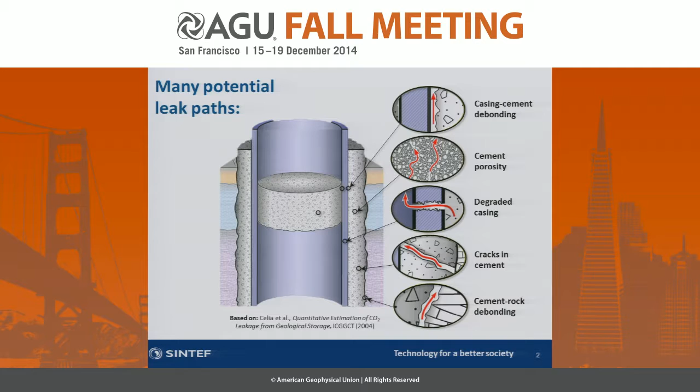And then after cementing, you can, of course, have a variety of flow paths. You can have leakage between the casing and the cement, between the cement and the rock, or through the cement, either through the porosity of the cement, or through cracks in cement, or through degraded casing. And this is, of course, the same when you plug the well. You will again be struggling with leakage paths at the edge of the plug or through the plugging material.

So what we did in the BIGCCS project was that we wanted to try to find out what the size of the apertures of these leakages are. So how large are these microannuli that people are talking about, and why and where do they most likely occur in a well? So what we did was to first make some small samples, as you see here, with a hollow rock cylinder with cement inside.

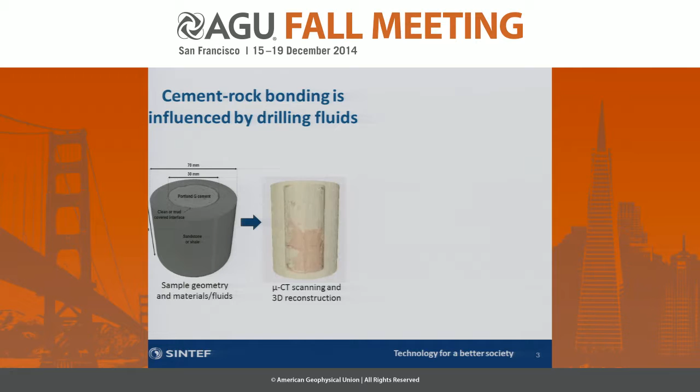And then we varied the surface properties of the rock, so they were either mud-covered or clean. And we used two muds that are very typically employed, so oil-based mud or water-based mud, both commercial muds that are used by industry. And then we scanned these samples using microcomputed tomography, and then reconstructed them in 3D.

And we identified the porosity at the interface between cement and rock. That's the pinkish stuff that you see in the volumes here. And we did that for a lot of samples. I'll show you 6 of them here. So we also had filter cake at the edge of the sandstone and the cement. In this case, you see the no mud, the water-based mud, and the oil-based mud cases.

And this is relatively interesting because in Norway, the use of the oil-based mud is restricted because they're afraid of leakage of the hydraulics when you're drilling the well. But what you see here is that the oil-based mud is actually giving the best bonding compared to the water-based mud, both for a sandstone and a shale sample.

And the V here is the volume of the flow paths, while the B is the bonding percentage. So it's the percentage of the cement surface that is in direct contact with rock. So if it's 100%, then you have perfect bonding. And then the more interface pores you have, the lower the bonding percentage.

And then this no mud situation, where you don't have anything at the interface, that's of course a simplification that you cannot achieve in a well. Usually if you use spacers, etc., then you will still have some mud at the interface when you do your cementing.

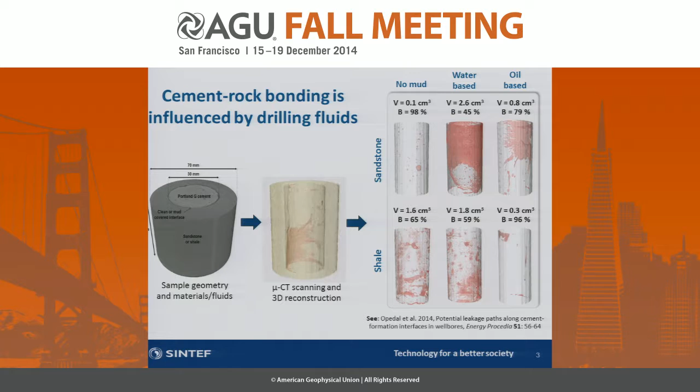So then we did a lot of mapping of this for the rock cement surface. And we did the same also for casing cement. So then we made a variety of samples, again mapping the interface pores using micro-CT. And in the case of casing, we saw very few pores at the interface.

So the casing is gray here, and when it looks bluish, it's because it's surrounded by a layer of mud-affected cement. But the porosity in this case was not at the interface. So of course, to be able to determine any type of leakage from these samples, you would have to check the properties of this mud-affected cement in each case, because there was very little porosity that could be seen by CT.

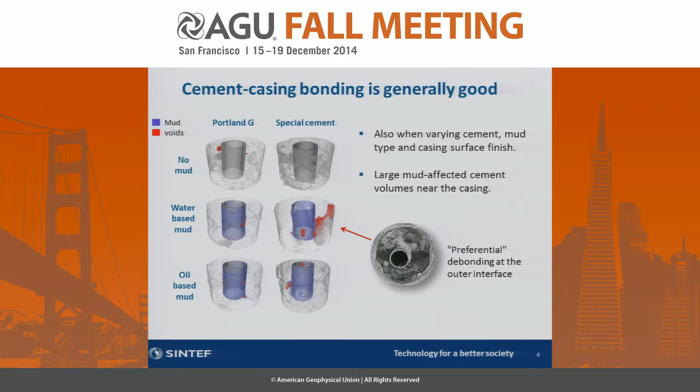And what was interesting is that this very good bonding that we saw in this case seemed to be a geometry effect, because we were making these samples in autoclaves, and at the outer surface of the autoclave, you saw more debonding. So this is exactly the geometry that was used when we looked at the cement rock bond. Then you had a rock surrounding a cement. So that might be something related to geometry there, and that's something we're looking into right now.

But we see that in the case of a very well-bonded rock, then you also have areas where you have very, very little leakage. So what we found is that even very small, well-bonded areas of cement can be a very efficient barrier towards leakage. While when you have a lot of interface porosity, then of course this has a very high permeability.

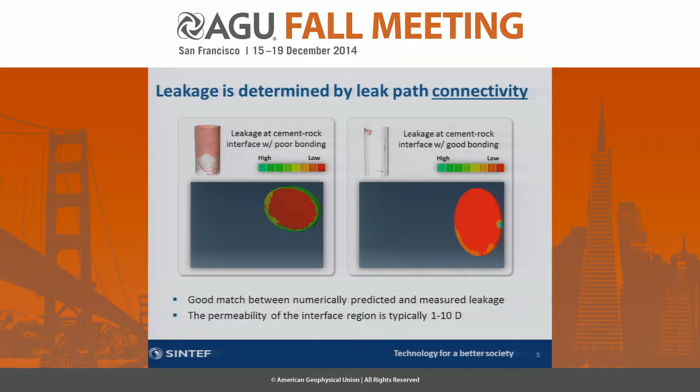What we measured when we compared the simulations with actual measurements of flow through these cores was that the interface region had a very high permeability, between 1 and 10 Darcy. So that's a really high permeability, similar to sandstones that we use to inject CO2 into.

And then in addition to all these defects that I've gone through now that can be present at well construction, that are decided by which materials you use and which procedures you use for well construction, you can also have this operation-induced damage to the well. So in this case, we looked at the temperature variations in the well, because when CO2 is expanding, you have a cooling due to the Joule-Thomson effect, and that can be the case when you're injecting into a very depleted reservoir, or if you have a leak in the well.

And then, of course, the casing will expand and contract more than the surrounding cement and rock if this is repeated several times, so it cycles. And this can be very damaging to the well. You can have these tensile radial stresses or tensile hoop stresses that can cause debonding or radial cracking in the well.

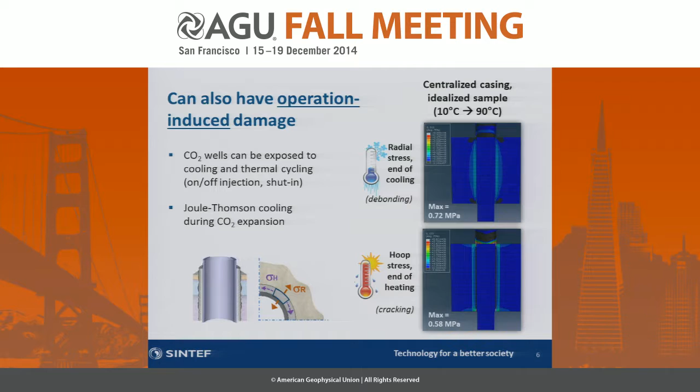So to look into this, we first did some very simplified simulations using Abaqus, where we just exposed a very idealized, centralized sample to temperature variations between 10 and 90 degrees. And what we found was that in this idealized case, we have very low stresses that are building up in the sample, all less than 1 megapascal. But what we were wondering was whether this is actually representative for what is going on in real life. So we wanted to get some experimental-based information on this case.

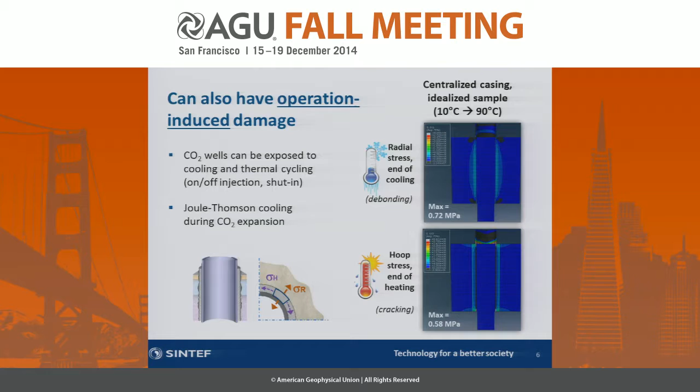And we decided to do that by using an existing setup that we have at SINTEF to study how temperature variations actually affect the well. We have a setup where samples, as you see here, with rock, cement, and casing, can be exposed to radial temperature variations. So this green slab that you see here is just isolation, and the temperature variations in this case are purely radial. So this copper rod is both heated and cooled at a very controlled rate, so you can put temperature cycles at will between -50 and 200 degrees on this temperature platform.

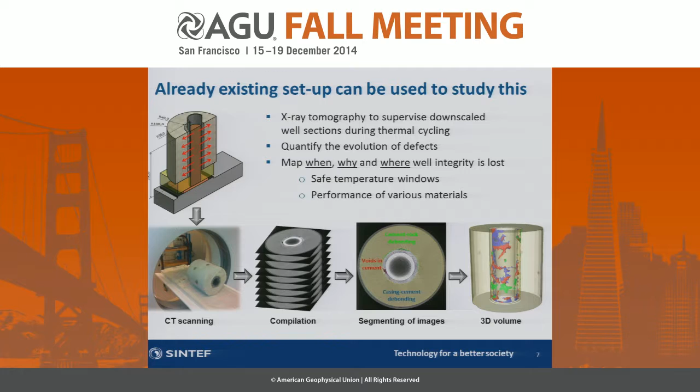And then what we're actually doing is scanning these samples in a medical CT, and again looking at how defects in the cement, for example the cement-rock debonding, voids in cement, or casing-cement debonding, are evolving with time. So here you see a typical sample before any thermal cycling, showing that it's very difficult to get a really good cement job, even in the laboratory. It looks a little bit worse than it is. The blue here is debonding between casing and cement, and the green is between rock and cement. And this is even before any cycling.

So just to show you that this setup has been tested for the temperature range that we looked at, so 10 to 90 degrees. Here you see what is going on after 3 cycles. This is before cycling and after 3 cycles. And you see the volumes of each of the defect types that we've gone through here. And for the perfectly centralized casing, you see that very little is happening during cycling, at least for only these 3 cycles that we have tested so far.

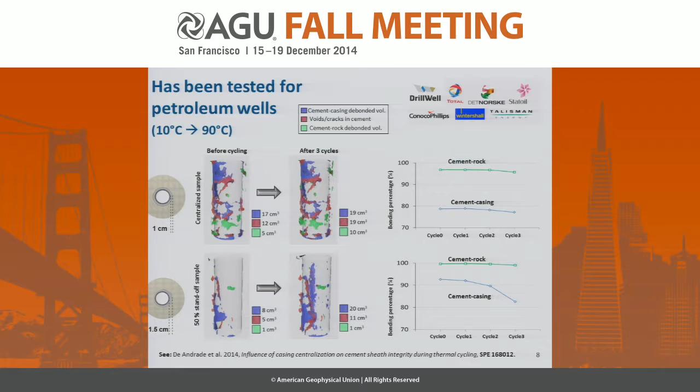While for the off-centered casing, you can actually see that a crack is developing in the sample. So this crack was on the thin side of the cement. So here you have a 50% casing offset. And then you can, of course, plot how this debonding is varying with each cycle. Here you see the 3 first cycles where little is going on in the centralized sample, and where you see quite a lot going on in the off-centered sample.

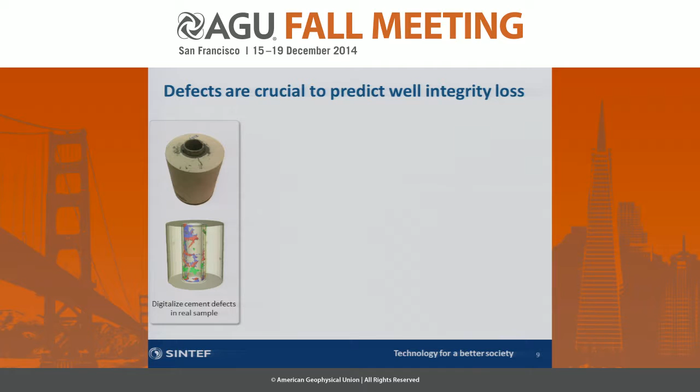And then what we are doing is to use these samples to actually, again, put them into Abaqus. So map the defects, the digital defects from CT onto the Abaqus mesh, and then expose the sample to temperature variations, the same temperature variations that we have in the laboratory. And then we get a completely different picture of the stresses building up in the sample.

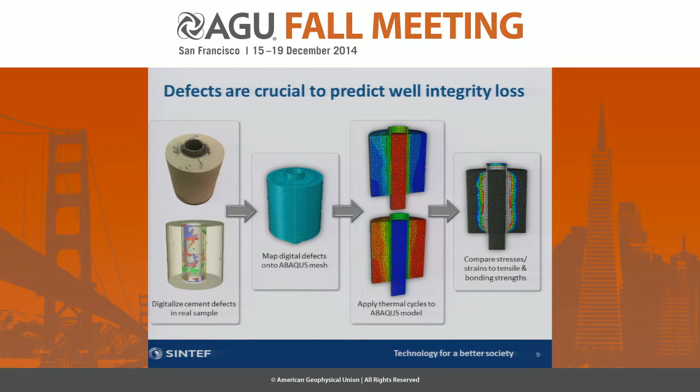So here we saw that with the defects in the cement sheath, you can actually get quite strong stresses in the sample. And this is now ongoing work where we are trying to predict what is going on, and in addition test it in the laboratory. And we are measuring parameters that can be used as input here, for example, the bonding strength, etc.

And also the importance of defects. If you want to do any kind of simulation here, you see that the idealized case, where everything is centralized and there are no defects in the cement, gives a very different picture to the one where you actually have some defects in the cement.

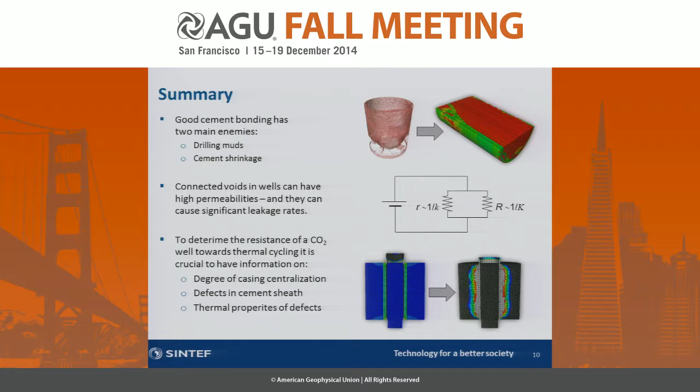I was just wondering what fraction of the existing wells are perfect? I think that's a very, very low fraction. I know that in the Gulf of Mexico they had a test of 15,500 wells, where they checked the occurrence of this sustained casing pressure, which means that pressure is actually building up outside your casing, and even if you bleed it off at the surface, it just continues to build up. This is of course an indication that you don't have perfect zonal isolation in the well, and there they found that when the well is 15 years old, it has a 50% probability to have trouble with leakage.

And I think among the 1.8 million wells in the world today, they estimate that about 30 to 35% have problems with this sustained casing pressure. So I think the defects are really important to take into account in this case.

So what do you do about it? Yeah, that's actually one of the things that we want to look at in the BIGCCS project. So we are going to look at different ways of remediating these faulted wells. So now that we are creating these problems in the laboratory, we can also check how they can best be remediated. Because in order to plug a leaking annulus, you would at least need to know what kind of apertures you're trying to plug, what kind of viscosities of remediation fluids are needed, etc. So that's one of the goals, one of the things that we want to look into.